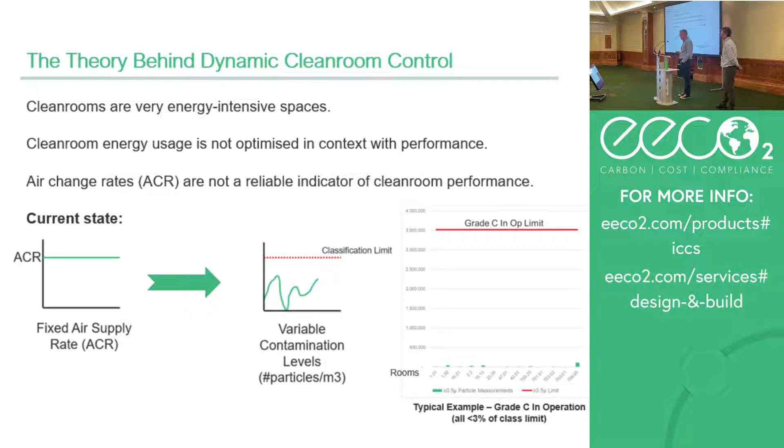Why is this important? Because the amount of air that we're processing through the clean rooms has a big effect on the fan power particularly, but also heating and cooling, but mainly fan power. And we only need to change the volume there a little bit to have a big impact on the energy consumed. So if I reduce the flow by 10%, theoretically there's a 28%, nearly 30% reduction. Okay, you lose something for inefficiency, but it's a big impact.

So too, if we have 10% more air than we really need in those spaces at any one time, you've added 30% to your energy bill for running that facility. So it's important to get this right, and lots of people talk about how we deliver efficient clean rooms, and ISO 14644 Part 16, that Connor over here and I and maybe some others in the room worked on, gets right to the concept of let's design the clean rooms to be as efficient as they can be and to be right for the processes that are in them, and not to over-egg the pudding, if you like.

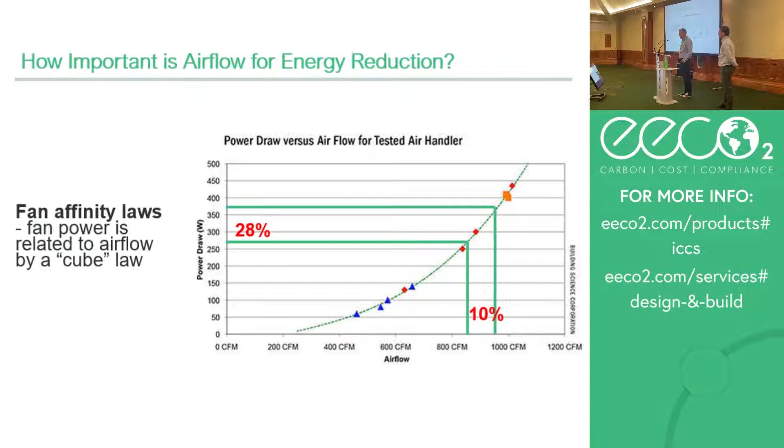So where we were coming from is, well, okay, if the activity and the particle generation rate in the room is variable, and at night times there's nothing there at all because there's no people and they've all gone home, weekends the same, why can't we vary the flow to these spaces to deal with the contamination at that point in time? So this is what the intelligent clean room control system does.

So we're actually detecting the particle contamination in the space, and we're varying the supply airflow to the rooms to maintain a fixed level, essentially. So that fixed level can be 10% of the class limit. So we've got that safety margin. We're still well within control. Could be 20%, could be 50% when there's no production going on. It's entirely variable and based upon the risks of what's happening.

We also, at the same time, so we're just talking about particles, there are also critical factors that we need to control. So temperature and humidity, clearly, pressures. If we're varying the flow, we need to have very good control of pressure. We're actually monitoring oxygen levels in the room because, again, we're varying outside air rates and we need to make sure we've got enough for people in the room. And we can also, as I said, vary the set points on the percentage of class limit we want to control to.

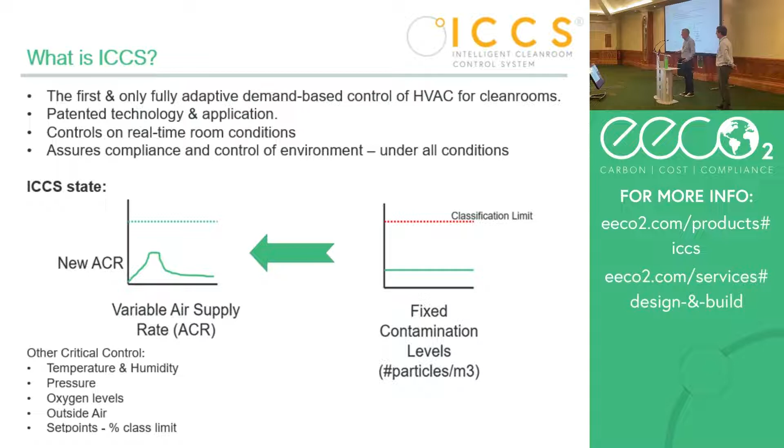So that's what ICCS for us does. It takes all of those inputs and variables and determines what the output needs to be, particularly for flow. So that's great from an energy point of view, but clients actually want compliant facilities. So we also have a facility at Cambridge Pharma that David will talk through in detail. That facility was a quality-led design. The client wanted, and we wanted, to build a facility that was really world-class in terms of its approach to quality and compliance. We wanted high performance under all clean room operation conditions.

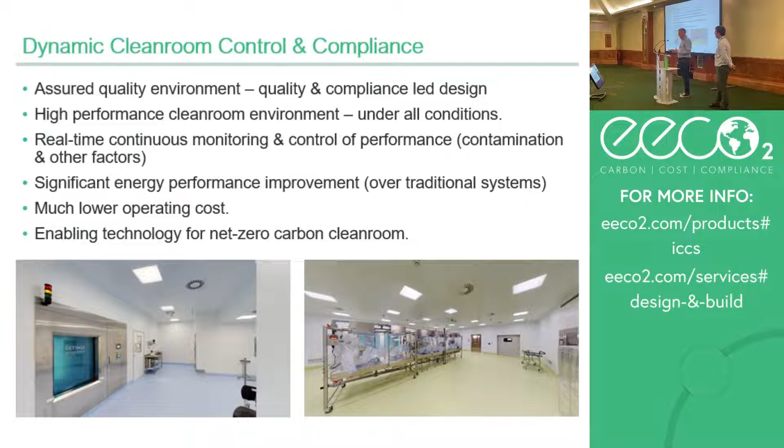And what we've got is the ability to do real-time continuous monitoring of all of the critical room conditions, including particulate levels in a grade C environment, which you wouldn't normally do. And what we've got is something that delivers much lower operating costs for the client, but also critically gives us more understanding of what's happening in the space, more control of that, and more data to allow us to understand how that room's performing.

David. Take the controller as well.

So I'll give you a little bit of background to the project. We are Cambridge Pharma, who are a new CMO company. Our sister company was set up about 12 years ago by Matthew Young, who had worked for years in developing auto-injectors and other devices. And what he had found was that they're often not centered around the patient, or they can always do better, but it was always being driven by cost and by time, and he wanted to make something different.

That company is still around, but obviously that's a development company, so they've set up our company to do the actual manufacturing. But we have that similar ethos that we were looking for something a little bit different. We're prepared to try something a little bit new. We're not just going for straight down the middle, the cheapest, quickest thing that we can achieve. And as we go through it, you'll see that we've actually taken some chances here, but I think they're quite good because what we really were after was the compliance.

When we tried to get our drug product filled to go into our auto-injectors, we were turning up at CMOs, and they basically went, okay, you've got a novel container. This isn't one that comes off the shelf. It's going to take us a long time to qualify it. It's going to take us a while to set the system up.

So just like all good events, and I'm going to plug the drinks event this evening, my CEO sat down with the owner of the company one evening, and they went, why don't we make our own clean room? They brought me in about 3 years ago. We've been through numerous designs. We've worked with some CMOs on products that we currently have. But finally, we are here. We're making our own clean room.

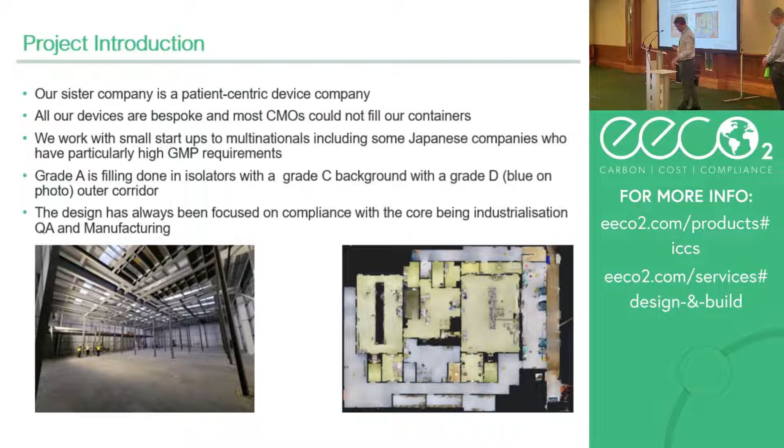Some companies just go, give us the product as quick as you can. Others are, this is what our corporate standards are, please achieve it. So we had to make a design that could cover those aspects. But the main thing that we wanted to do was look at the compliance.

12 years ago, pretty well to the week, I started my first managerial position in a clean room. So a couple of filling rooms, a couple of sterilization rooms, all operating under grade A air supply. I came in, the manager had left a lovely package for me. She had left about a month before I arrived, and in my in tray was a nice big pile of deviations related with out of specifications for particles within the clean rooms.

Everybody knows if you're working in grade A, grade B, you're going to get them at some point. It takes a lot of time to sit down with the quality department, go through those deviations. Even if it's just one spike, you still need to actually explain why it's there and write in your justification. I also have done a couple of years of auditing and looking after CMOs, and I know as an auditor, I go into places, I pick up the quality reports, and you look at it and you go, out of specifications. Can I have your report?

And what we're trying to actually achieve really in clean rooms is a steady state. So when we started talking with EECO2, and they're saying, yeah, we can start ramping up the air to make sure, we were only initially looking for setback overnight. When you suddenly start talking about ramping up the air during production as different amounts of people come into the room, and you're beginning to control that, instead of having those spikes that everybody has seen, you monitor the clean room, people go in to clean it, bang, there's the spike where the people came in, that's where they started getting the mop out.

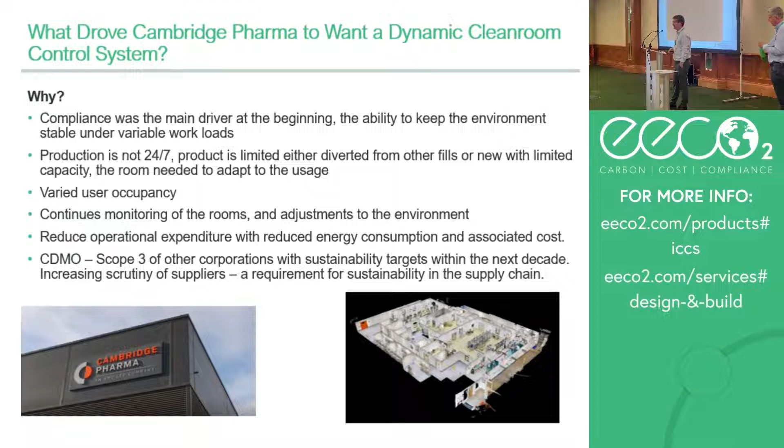Right, first time presenting to an audience in about 20 years, and they give me a video. Here we go. Yay.

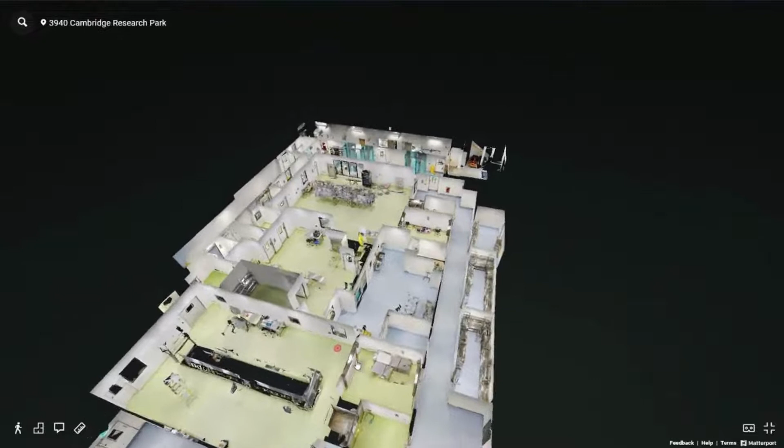All right, get used to some spinning. We'll go through the facility, but as you can kind of see, this is actually from a Matterport camera. So a bit like Google Street View, where you can jump around from place to place on it, and you will see us jumping around. So this is an actual real picture generated from this camera.

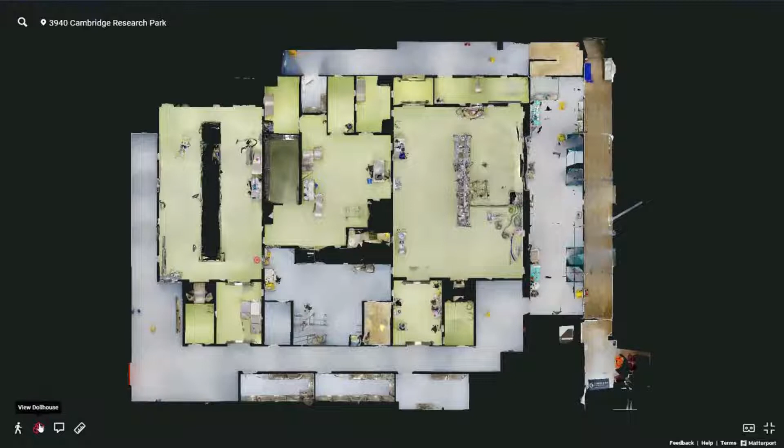You can see through the middle, we've got a green zone. That's our grade C core, so autoclaves and wash in the middle, and 2 filling rooms either side of it. We have a blue corridor around the outside. So as I've done before, blue corridor is grade D, grade C is green, and guess what color the gowns are going to be in each room so you can work out which category you're in. The flow of product is from the top, which you've seen, and going down, so it's fully unidirectional.

As we said, we're jumping around a little, but we're now into the autoclave room. So we have an autoclave room and a washer, both double-ended. So dirty comes into the clean area here for the autoclave, and again, through the autoclave out into the filling room, or we can do single-ended, and we can pass it through into the other filling room on the other side. You can just see, just missed it, the particle counters there, which we'll pick up in this room here.

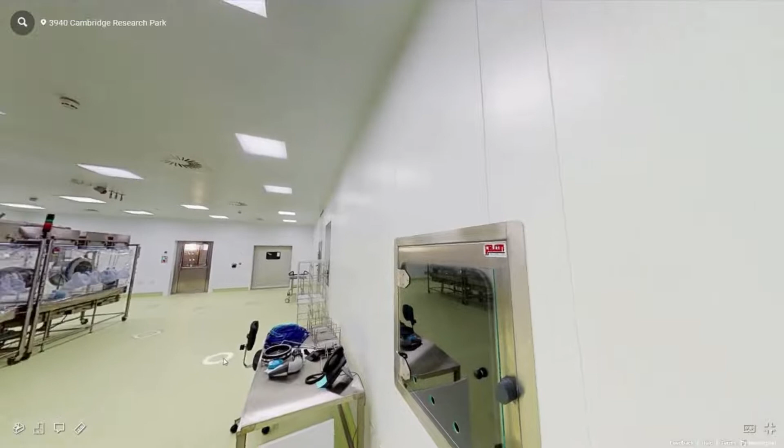Going into the filling room, jumping around. This is now the filling room. As you can see, we are still in the point of qualifying it. So you will see the odd bit around. Some of the equipment is there. This is our soft-walled isolator, flat base plates, so we can bring in different equipment, different types of fill. So we're looking to be quite quick, quite responsive, and able to change things around quite quickly on this.

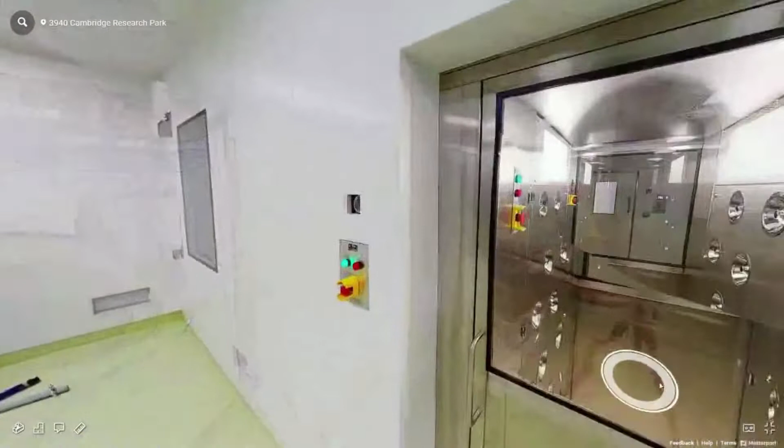We do actually have an air shower, and there is somewhere a video of me going through the air shower being blasted. It's also, as I've told my team, probably going to be a great place to be when it gets really hot during the summer. Have nice fresh air blowing over you. Great if you're a pollen sufferer as well.

You've just seen the grade D corridor there, which has the blue flooring around it. And again, we're now going into the washroom. You saw the concrete floor. The tacky mats are going in this week, finally. Grade D washroom. You can see that we've got the chemical spill kit still sitting on a table rather than actually hanging up.

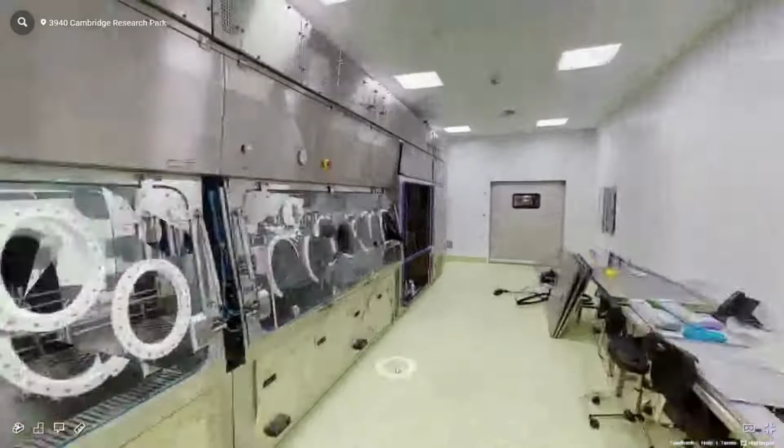The orange doors, again, we color coordinated. So the orange door is going out to the outside, back into the CNC, and these are through the roller doors to the second filling room where we have a 5,000 unit automated machine. I haven't seen Paul Stanway here yet, but it's one of his bits of kit. As you can see, we're in the qualification. We've got bits missing off the side whilst we're doing that. We've got some gloves still out.

This was 3.5 minutes. I thought this was going to last forever. It's done.

Qualification. We've had 3 meetings with the MHRA. They've been very positive about what we were trying to achieve, and we did actually ask them at the beginning, should we go with a fixed air rate and then try and incorporate how we're going to set it up to do variable air rate changes? And they were like, why are you going to change it? Why don't you just go straight in? If you think it's going to work, do it.

And so far, we've got it switched on. We're beginning, and Keith will talk about it, we're beginning to see particle counts in the rooms. They all look very under control, very well maintained. You've got to remember, at the moment, people are just gowned in white suits. They're not in the full gown. We're not making them strip down to underwear and put on the underpieces. It's just a coverall. We're just trying to stay clean as opposed to actually maintaining GMP.

We're basically going to follow particles. If the particles are under control, we're expecting our viable organisms to also be under control. You have to remember, new facilities, we are going to be quite a good standard anyway. We're operating, as I said, with the Japanese company. We've got quite a high level of gowning, slightly higher. It's not a grade B, but it is slightly higher than maybe most grade Cs would be

on the way that we're enforcing it. We will obviously monitor our pressures, temperatures and humidities, but our temperatures and humidities are as much for human comfort. We don't actually have any products that require a temperature control. But again, we are seeing very stable controls throughout the room. Our humidities are down at the 45% mark, which again isn't going to be the best conditions for growth of any organisms within it.

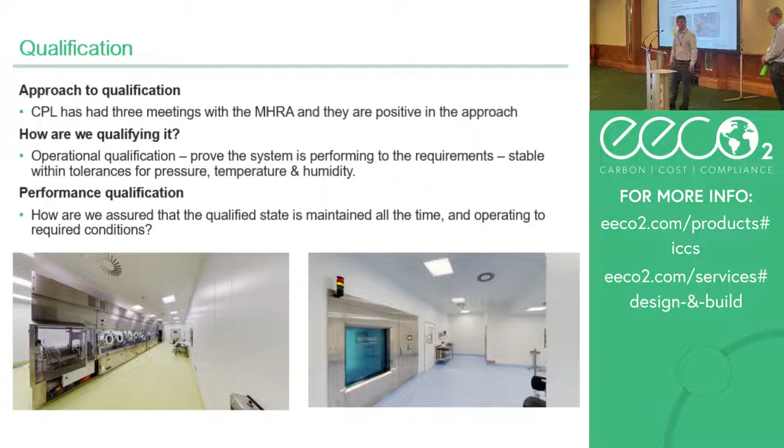Okay, so I'm going to show you some early results of what we're seeing in the clean room at the moment. So the current approach to operational qualification, we will obviously do that at rest, and we've got some initial results there that you can see. We're going to do the at-rest qualification at the minimum airflow rate in each suite, which we think is going to be around about 5 air changes an hour in grade C. So we're down very, very low.

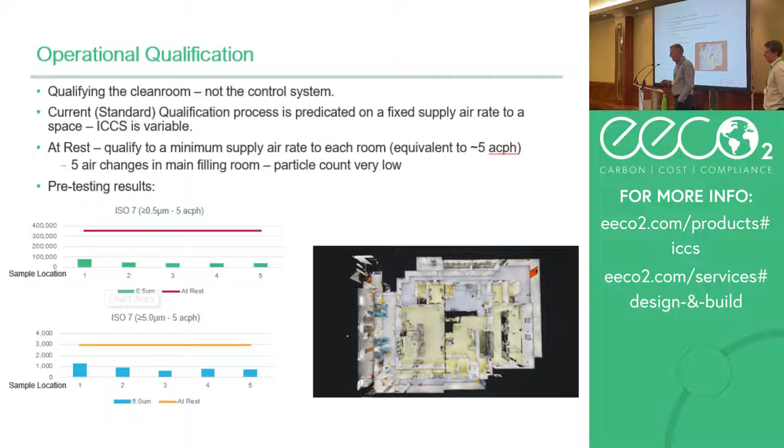And already the preliminary results are an easy pass. It's kind of 20 to 30% of the limit for ISO 7 at rest at the moment, and that's at that very low flow rate. So we're quite encouraged by that. It operates as a good clean room should. The rest of the approach to qualification is, and we're midway through really commissioning now. We've done some early tests, as you've seen. We've done some dynamic tests as well, which I'll show you in a minute.

You know, innovation is difficult, right? We've got a theory and we've got a hypothesis around stuff, but we need to prove it, not only to ourselves but also to external regulators. And as we understand more about how the system performs in a dynamic way, we'll learn much more about how we can then demonstrate to regulators to prove it.

So I can't stand here today and tell you that these are all the steps that we're going to go through. We have a hypothesis. We think that the science and the understanding is sound, and what we've seen so far in the testing has proven to be the case. As we get into proper PQ, OQ is not an issue. PQ is where we'll really discover things.

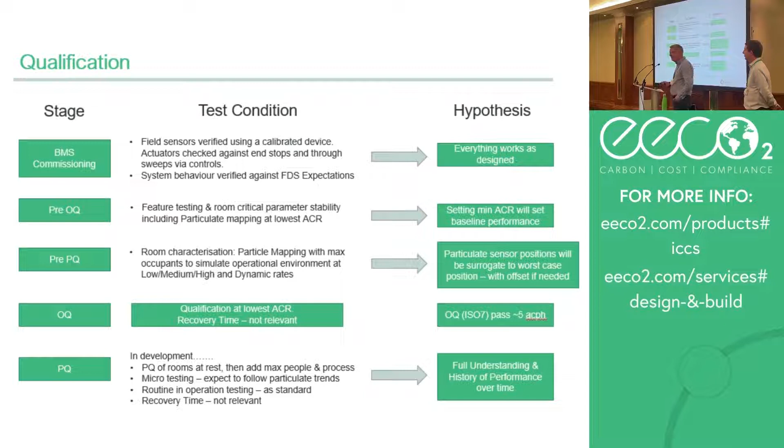But one of the things about when we optimize clean rooms today and look at how we reduce energy in fixed flow clean rooms, one of the challenges is recovery time. You can maybe maintain a steady state at very low airflow, but what happens if we have an incident? Well, recovery time on a dynamic system is not particularly relevant because you're always going to keep to that fixed level, whatever happens. So I'm going to step through now a few, I know this is very small, but I'll step through quickly.

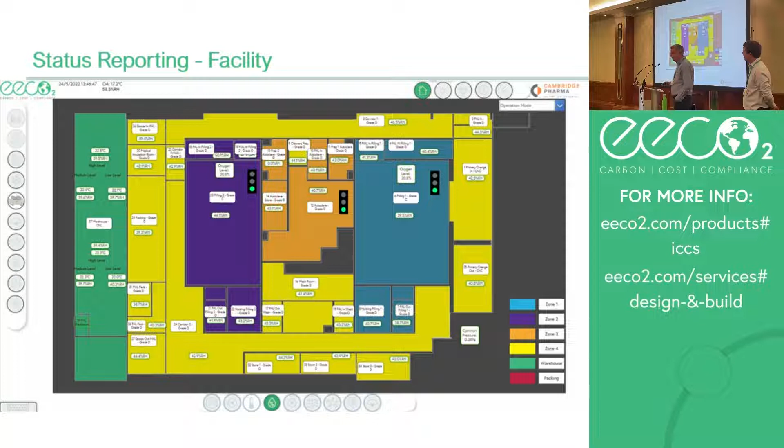We have an HMI panel in the facility, so we are tracking all of the critical parameters: contamination levels in the room, heat, temperature, humidity, differential pressure, oxygen levels, air change rates in each room. All of that data is fed in every 10 seconds or so. It's very fast. We're capturing all that all the time, so we can dive into a room and see exactly what's happening in that room, and obviously have all that trending data as well for any investigations that may be required in the future.

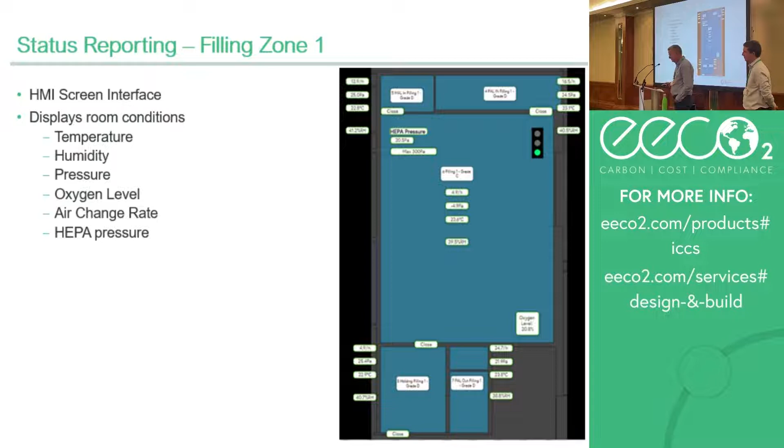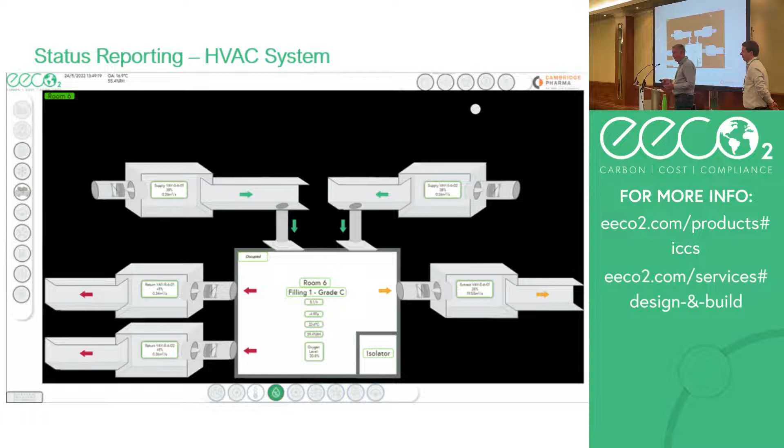The overall concept around each clean room is we have supply VAVs and extract VAVs, variable air volume valves, and that's how we're controlling the air handling unit fan speeds and varying the flows in and out to critically maintain the pressure. And the pressure control is really stable, very good, and it works well.

So in terms of results, we're predicting something like a 50% reduction in energy consumption over a standard fixed system for that kind of level. That's assuming 15 air changes in a grade C, which is not unreasonable. I've seen many of those clean rooms, saw a few last week actually, up in the 60 to 100 air changes an hour in that facility.

When we design a clean room, we'll go to the nuts of what we need, and 15 air changes is below. We're seeing 50% of that in terms of what we predict the operational annual cost would be, which is worth a significant amount to the operating budget for Cambridge Pharma. But critically, continuous monitoring as well on all of that data.

The charts here haven't transferred very well on the screen, but to explain a little: each one is 0.5 micron, and 5 micron below. This is the system in dynamic mode. Time is hours across the bottom. Where that circled bit is, the red line kicks up; the flat blue and flat yellow lines are 10% of the compliance limit. So that is in operation, and we've got 10% of the limit that we're controlling to.

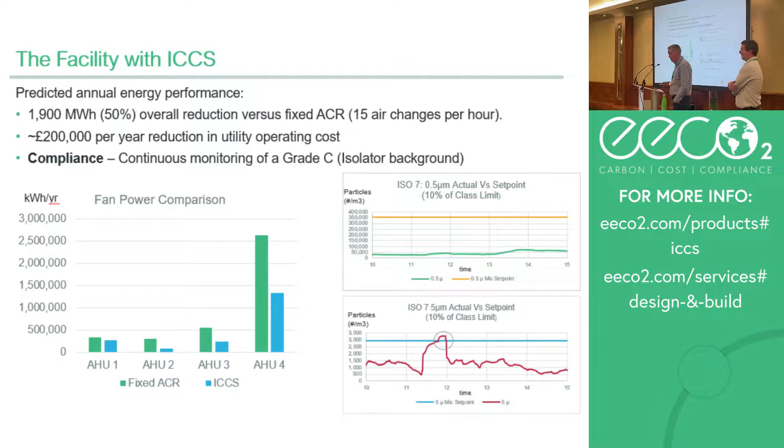Also, nowhere near the compliance limit for that particular room. So we're very confident it works, and it definitely delivers a better environment at a lower operating cost and impact on the environment ultimately. This is the final slide. We're seeing the technology is pretty stable, and it works as we'd expect. As we get into more of the commissioning and detail, we'll learn a lot more, but the physics and science around clean rooms is well understood, and what we're seeing in reality matches the theory.

Qualification is one of the most challenging aspects, I suppose. Now we've sorted the technology, and we're challenging the mindset, because we've been qualifying a clean room the same way forever, and now we're saying we can't qualify it in the same way. So how do we demonstrate that we're still in control, to ourselves, to the client, but critically to the regulators as well? All of us have a vested interest in figuring out those problems. We don't have all the answers right now, but that's okay, because that's innovation. But we're absolutely confident we can get it to work, and get it believed to be working in the not too distant future.